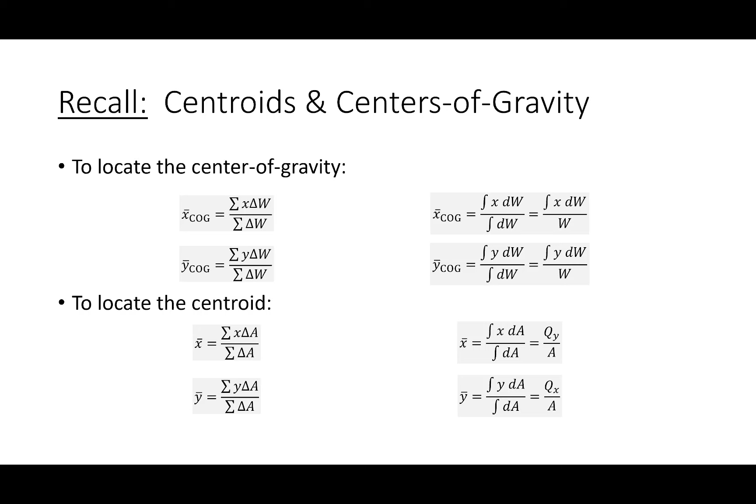Centroids of a three-dimensional region are conceptually no different than locating the centroid of an area or the centroid of a group of lines. It's all kind of the same thing. It's just instead of dealing in terms of areas, we're dealing in terms of volumes. Now, one of the things about a three-dimensional centroid location is that we do still use two-dimensional references.

So I'll give you an example. If I wanted to determine the location of a centroid of, let's say, a triangular prism—so let's say I had a triangular prism that looks something like this, in three dimensions, and that's a right angle, right? So where is the centroid of this simple shape? Well, how do we get there? We go a third of the way up, and then maybe like halfway, and that's where the centroid is.

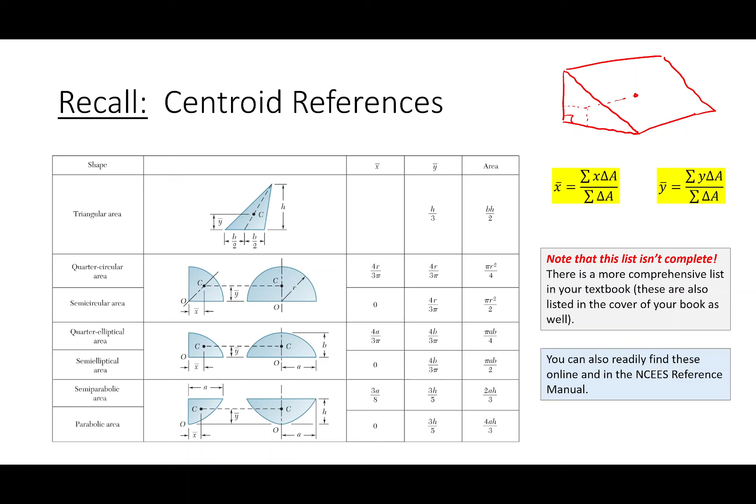Does that make sense? So even though it's a three-dimensional region, it's not like these two-dimensional references aren't relevant. Now that's not to say this is enough—there are some geometries where in 3D we would need a separate reference. So first off, by the way, the pattern doesn't change. We're just integrating or summing in terms of volume, not in terms of areas or in terms of length. But the real thing I wanted to point out to you is maybe something like this.

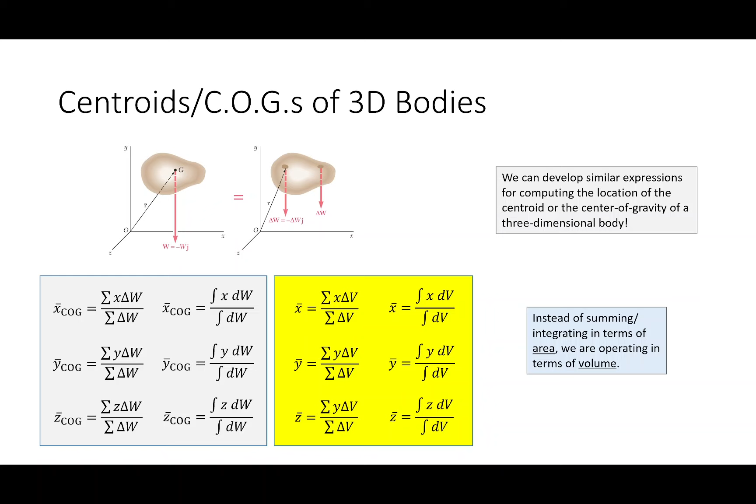So for example, if you had, let's say, a hemisphere—maybe you have some geometry that has like a hemisphere on it. This is probably one of the most practical examples of where a 2D reference isn't going to be enough. This isn't a two-dimensional shape that's been extruded, to use the Engineering 102 terminology. If you had a two-dimensional shape that's extruded, just find the centroid of that two-dimensional shape, and then halfway through the extrusion, there's your centroid. But for a revolution, maybe like a hemisphere or an ellipsoid revolution or something like that, the centroid isn't as simple to find, at least this way. And that's where these references come into play.

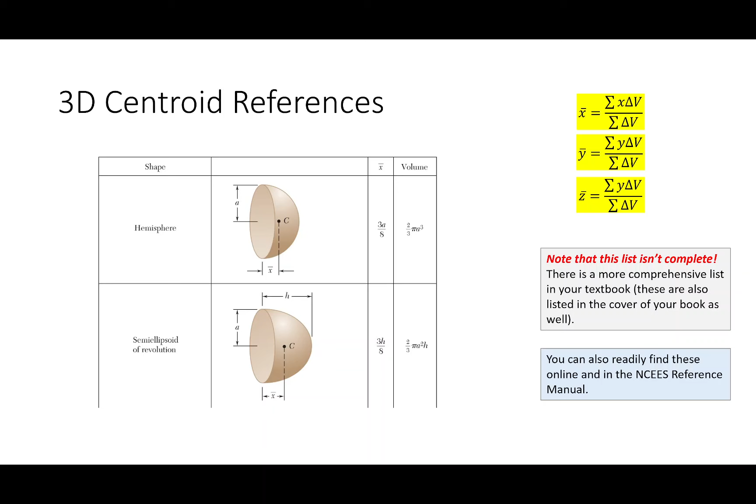I'm not going to use one of these today because I don't really think that's the challenge in locating the centroid in a three-dimensional body. If I'm going to occupy your time here in Engineering 213, I'd rather address what I think are the trip-ups that you're going to have, where you're going to have hiccups doing these types of problems. And the hiccups aren't, oh, well, now I need to use a new reference—you can Google this stuff. The hiccups are what I would call the overlap issue. And the overlap issue will become clear in this example.

Okay, so I have here a three-dimensional part, and we're going to determine the location of the centroid. Now, I'm going to go ahead and tell you that we are not going to locate the X, Y, and Z for the entire shape. What I'll do is I'll locate X, Y, and Z for each individual shape, and then for the purposes of demoing, we'll just pick one. I think I have my calculation set for the Z bar, and then you'll see what I mean—if you wanted to do X bar, if you wanted to do Y bar, it'd be all the same. So let's go ahead and jump right into the example just to sort of make the point, this overlap issue.

And this example really does test my 3D art skills as much as possible. Okay, so what we're going to do here is we're going to break this up into simple shapes the same way that we have been doing problems. And I'm going to see if maybe on this master image right here, maybe I can kind of illustrate what we're going to do. So let's see. Maybe what we'll do is, let's use some color here.

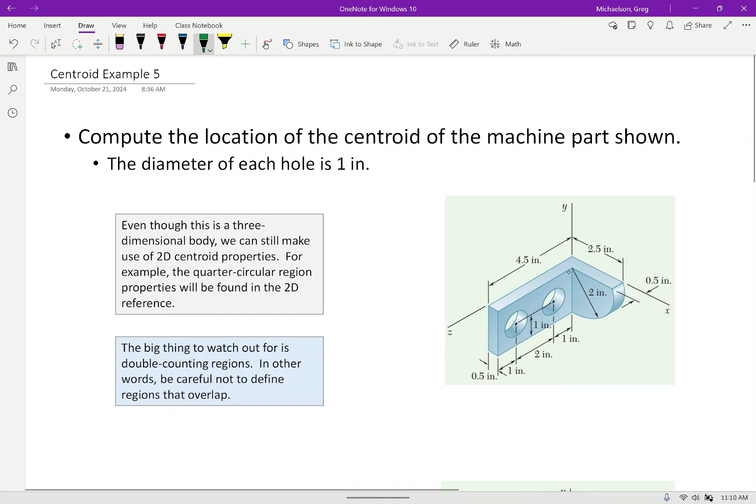Okay. So the first thing that sort of jumps out at my mind is this sort of quarter circular region right here, if everybody kind of sees this. So this quarter circular region, here's sort of the center point. So the center point is sort of like right there. And what we do is we jump out 2 inches and sort of revolve that way.

So if I wanted to separate that into a quarter circular region, I would say that this green line right there sort of corresponds to that simple geometry. Does that make sense? Everybody with me on that?

So if that's the case, I have this quarter circular region, and then I've got 2 holes, right? So I've got, well, I'll use red for those. I've got these right here, which would just be circular cylinders, right? So circle extruded. And then I've got the rectangular prism, if you will, the box, as it were, okay?

Now, the big thing that you want to do is make sure that when you're defining the box that you're fully encompassing the geometry. One of the things that's really sometimes tricky on homework problems or exam problems is to say, well, I'm going to define the box that goes like that. And the problem is that you're not accounting for this central little overlap region. So does the box need to go all the way to the end for this problem?

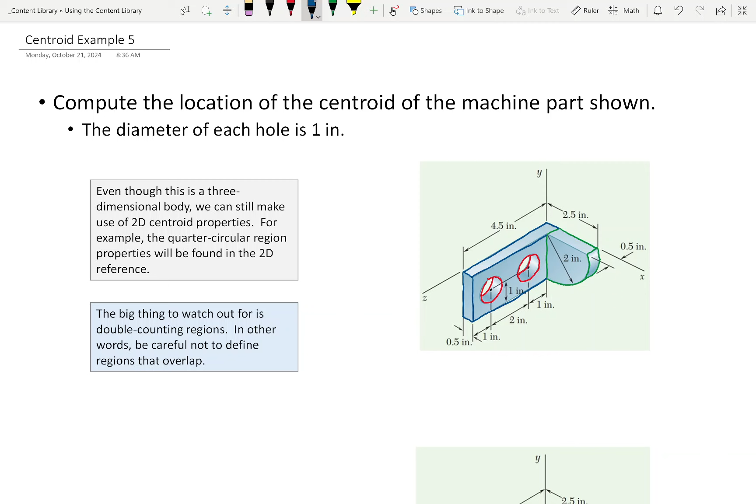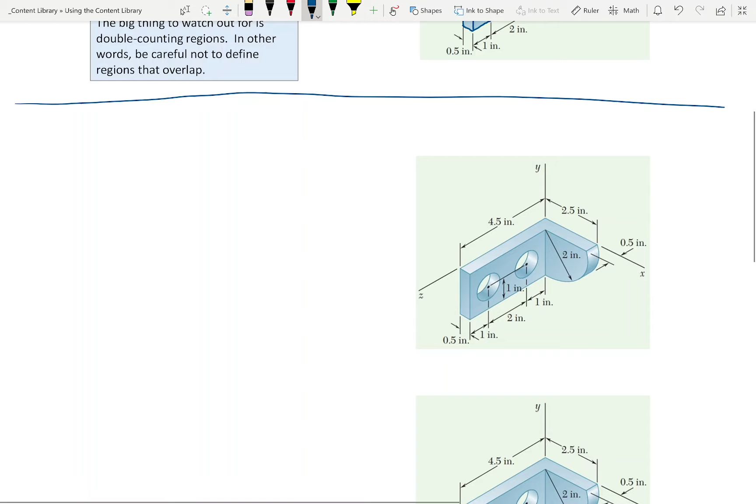And by the way, I sort of cheated here because I made copies of the image over and over again because as we're drawing this out, I didn't want you to go, wait, I didn't get all the dimensions. But I still wanted to go on with the problem. Okay, so we're going to do this one shape at a time. And I'm going to move this up a little bit.

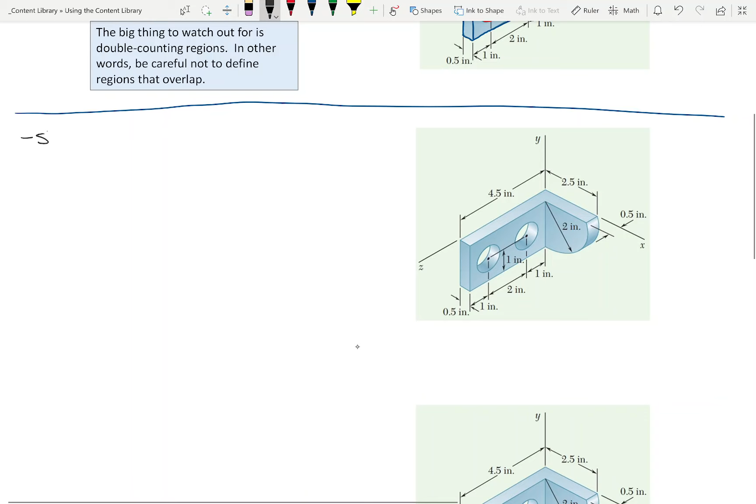And what we'll do is we'll say shape 1. We'll call this a rectangular prism, okay? So just to highlight that shape here on this sketch, what we're talking about is this, okay? So again, this is going to go into that intersection region, okay?

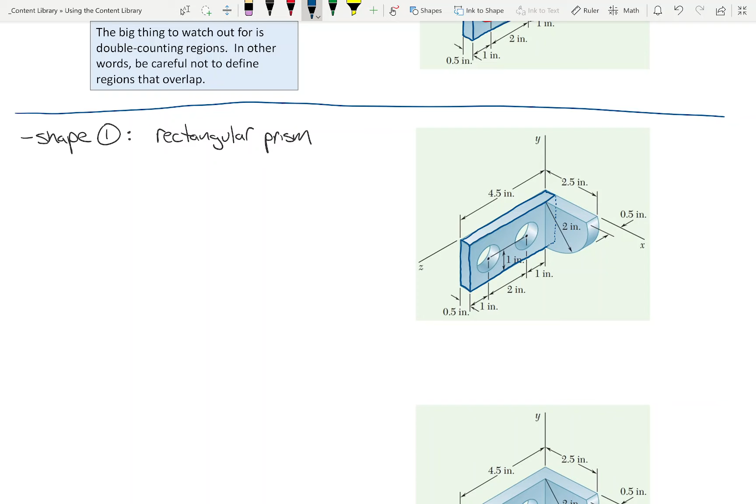And so what I'll do is, remember that perspective stuff we used to do in Engineering 102 where you could see behind the object? There's the dashed line. Okay, so maybe what I'll do now is I'll isolate that box over here. Let's just look at that box, okay?

All right, so the one thing I'll also point out is that point right there. Why am I highlighting that point in particular? What's so special about this point on the prism? Origin. That's the origin, right? So whenever we express our individual distances, we need to express it with respect to that point. Okay? So let's come up with some dimensions.

Okay, so let's see. What is this dimension? What's that dimension? That's 2 inches. Now, it wasn't explicitly given, but we know the radius of this quarter circle is 2 inches. So we'll call this 2 inches right there. Okay. Let's see. Okay, what's that? 4.5 inches. And then the thickness.

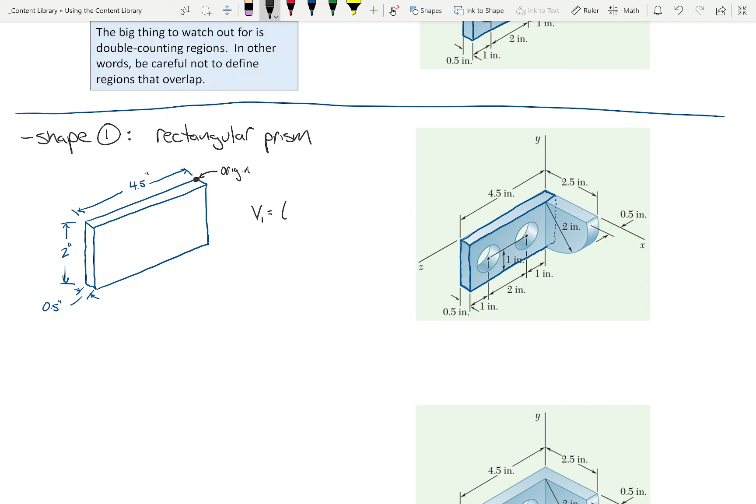That's a 1/2 inch. So therefore, let's do volume first. Let's do the volume. I'll call it volume sub 1. Okay. So this is a box. So the volume of a box is just length, width, height, right? BHL or something like that. So we'll say, right? So the 2 and the 1/2 are going to cancel each other out, and so that's going to be 4.5 cubic inches.

Okay? Sound good? And then what I'm going to do is I'm going to say, okay, give me an X1, a Y1, and a Z1. And we're going to express those with respect to the origin. Now, by the way, let's make sure we're all clear, right? The centroid of this simple shape is going to be like right there, in the middle of the box, in the center of the box.

So here, this is the x-axis, right? So how far along the x-axis do I have to travel to get from the origin to the centroid? Along the x-axis. A 1/4 inch, right? Because that's that little thin dimension. That's this 1/2 inch. So we're only going half that. What about the y-axis? Right there. -1 inch. Because the y-axis is pointing up. We have to go down to get to the centroid. So this is -1 inch.

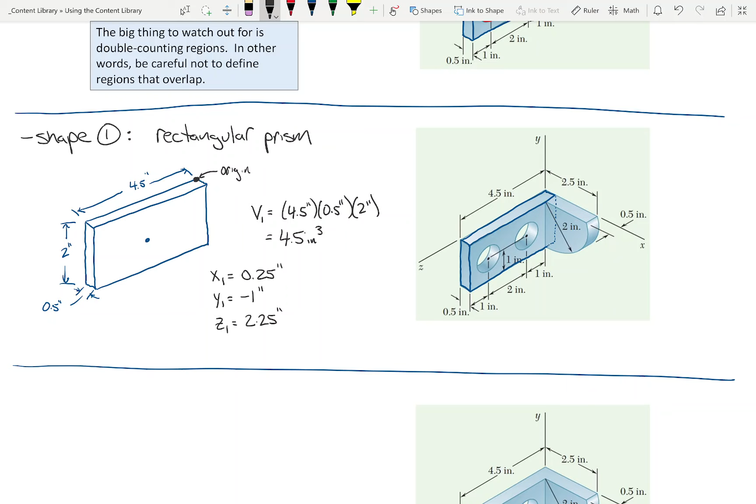And then along the z-axis is going to be what? 2.25. Okay. Is that okay? Does that make sense? Everybody okay with that? All right. Any questions? Okay. So now we'll do shape 2. And this shape 2, I'm going to call this quarter circular region.

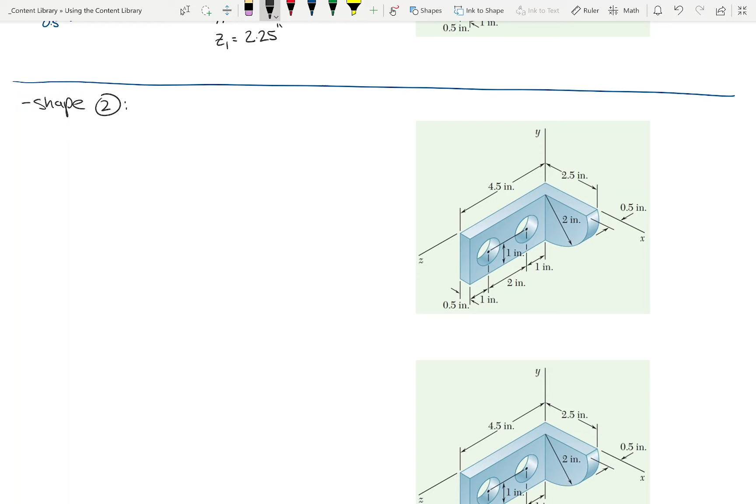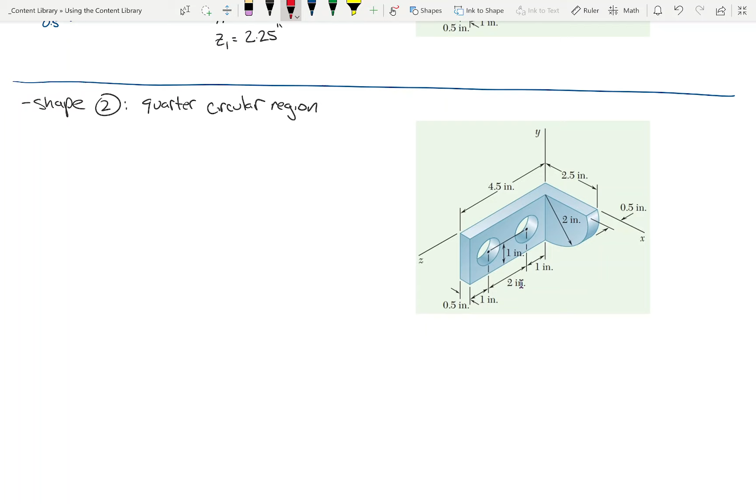And by the way, do me a favor. Let me drag this down because I have a feeling I'll need a little bit of space here. Let's go a little further. All right. So this is where bookkeeping is really important. So this is another sort of hiccup that you can get. So what we're talking about. Oh, what happened there? Sorry. We're talking about this region right here.

Okay? Now, by the way, for a quarter circle, right? And I'll stick this here on the board. If you have a quarter circle, and you want to find this dimension here, or this dimension here, both of them are still 4r/3 pi, okay? The same thing for the semicircle. So I'll just stick that up here on the board for reference. But we got to be careful with our bookkeeping, okay?

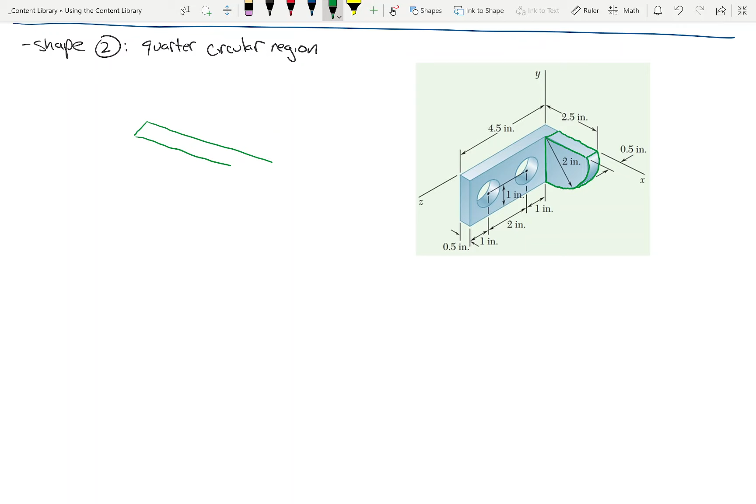So, oh, this is going to be tough. Okay, bear with me. All right, so let's see. I'm going to draw this maybe kind of big. Maybe that'll save me. That's about the best you're going to get out of me. I am not drawing that again.

Okay. Now, by the way, where is the... so hold on. Let's make sure we're all paying attention. So that's the origin, right? You're shaking your head no. Why? Because it's based off the origin a half inch away. Exactly. So the origin is actually like right there. Does that make sense? Okay. That's important because when we start calculating our X, Y, and Z values, we have to be cognizant that we're referencing these appropriately.

Okay. So let's see what I can do here. Bear with me. So by the way, let me just do this. R equals 2 inches. And then, wait, oh, wrong way. Both of these dimensions are going to be 4r over 3 pi, okay? And by the way, this thickness is 0.5 inches. Okay, and help me out. What is that dimension right there? This little dimension right here, from the origin to this little edge right here? 0.5. That dimension right there is 0.5 inches.

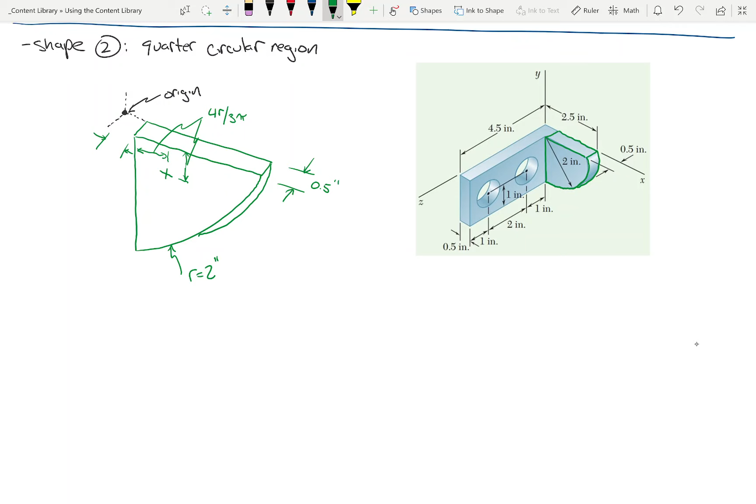Okay. Let me do this. Do something like that. Okay. I'm not drawing anymore. I think I'm hitting my limit on my artistic abilities.

Okay. Let's do what we did last time. Let's first off calculate a volume. So let's assume that this was a cylinder. How do you calculate the volume of a cylinder, right? So if it was a circular cylinder, we're going to have to do this problem here in a bit anyway. So you take the area times the height, right? So pi r squared times the height. But because this is a quarter cylinder, we're going to take pi r squared over 4 times the height, right?

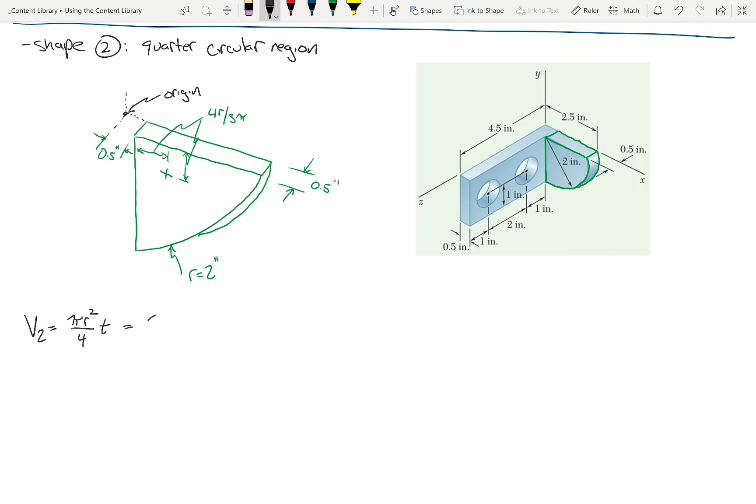So this is going to be, we'll call it times the thickness. Lower just a little bit. Does that make sense? So this is going to be, okay. So how's this going to work out? So we have 2 squared over 4, and 4 is going to cancel, so half a pi. Half a pi is what, like 1.571?

Is that fair? So what are we getting for these? Okay. Oh, I need a, like that. And if you want to know why I draw a line through my Z's, tell me the difference between that Z and that 2. I can't do it. Okay.

Okay, so let's start off. Let's do the easy one first. Let's do the Z-axis. How far is it from the origin to the centroid along the Z-axis? This way. Well, if it's a 1/2 inch thick, it's just going to be a quarter, right? 0.25. Maybe I'll put some space between these because I have a feeling I'm going to need it. Okay.

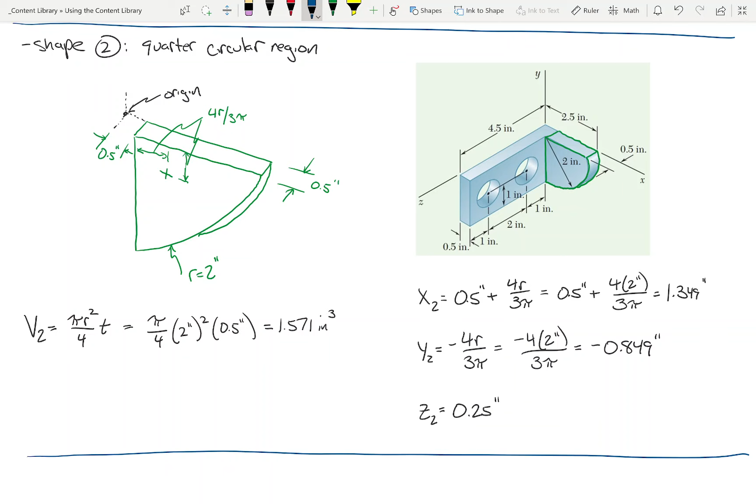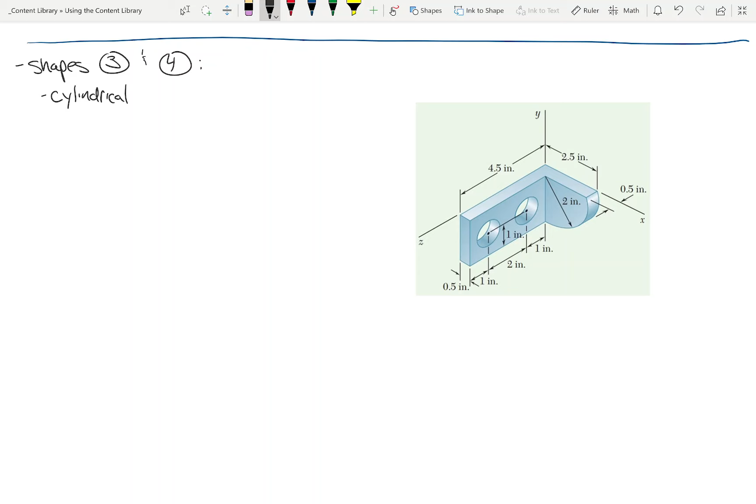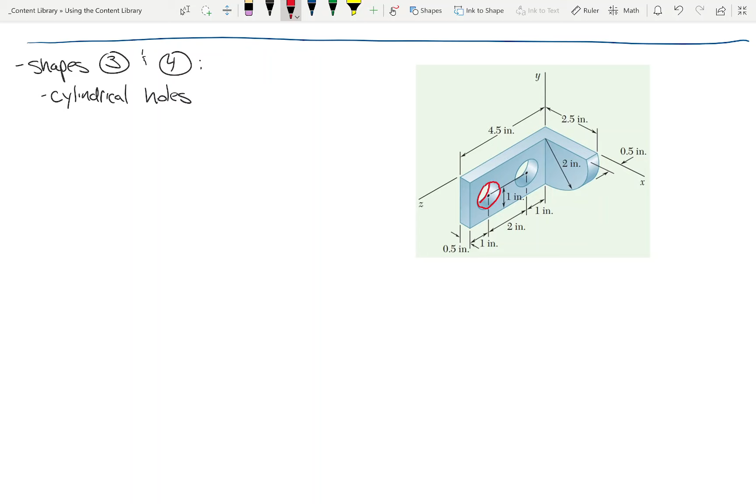All right, does that make sense? Everybody okay with that? Okay. So far, so good? Now go ahead and scroll. Okay. So the next thing that we have to do is these holes. Okay. And I'll call them cylindrical. Okay, so for these cylindrical holes, I'll drag this up a little bit. Okay, so we're talking about this and that. Okay.

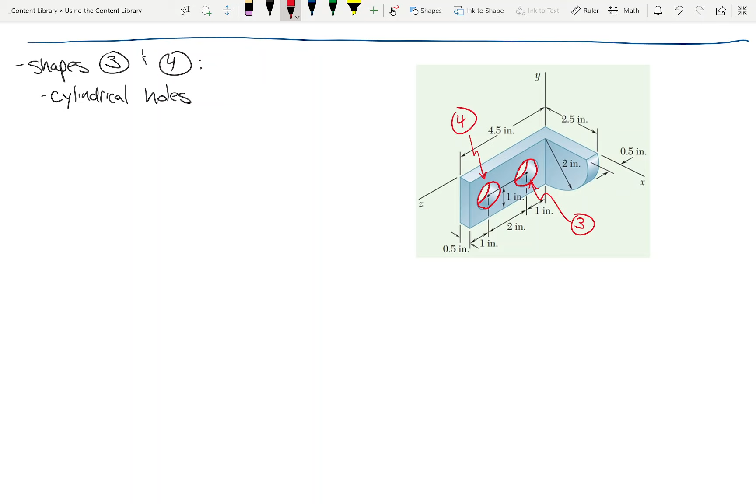Now, first off, let's label these a bit. Okay. So we'll call this hole 3. Call that 4. Okay. I think at the beginning of the problem, yeah, the diameter of each hole is 1 inch. So we'll say, note, the diameter is 1 inch, so the radius is a 1/2 inch.

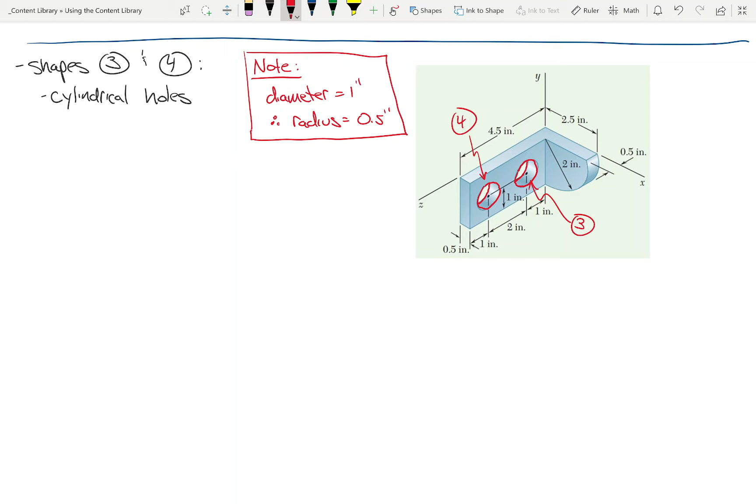Okay. So let's package together as many calculations as we can. Both of these holes are going to have the same volume, right? They're going to have the same volume, so the volume is just going to be pi r squared times the thickness, right? Anybody have a problem with this calculation? It should be negative. Why is the volume negative? Because it's a hole. We are removing that material. Okay? So this is going to be

that, or, so basically it's just going to be pi over 8. And I hope you'll permit that I can just tell you that's that. Okay? So far so good? Okay. So let's see what we can do. Okay, so we're going to have an x3, y3, z3, x4, y4, z4.

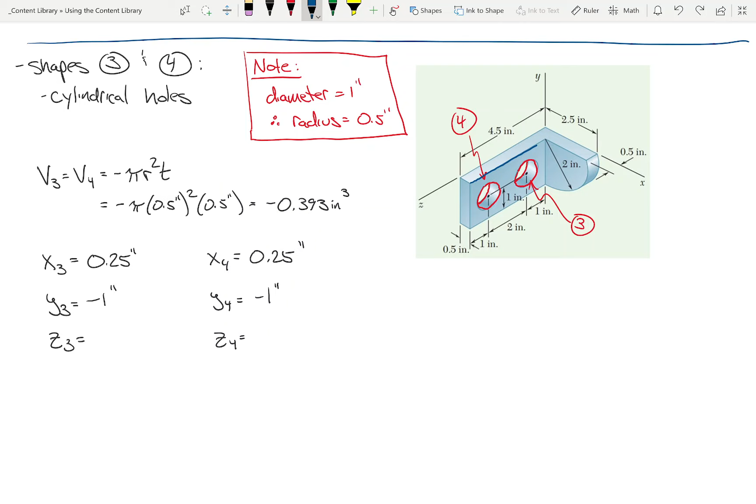What's the z going to be for 3? Let's say for 3. What's the z going to be for 3? -1. Okay. All right. 1.5. 1. Oh. Why did you say 1.5? Because there's this. Ooh, see? Right here. So check this out. So like the axis goes like this way. There's, oh, that drawing was horrible. Bear with me. So keep in mind, let's draw the blue box. Keep in mind the blue box goes back some.

What's that? Because the 1/2 inch is coming from the thickness of the quarter circle. Yeah, that's what I'm saying. We've got to account for that part. So what I'm saying is that Z3 is 1.5. Does that make sense? Because we got to go back that way. Okay. So if this is 1.5, what's this one? 3.5. There we go.

Does that make sense? Okay.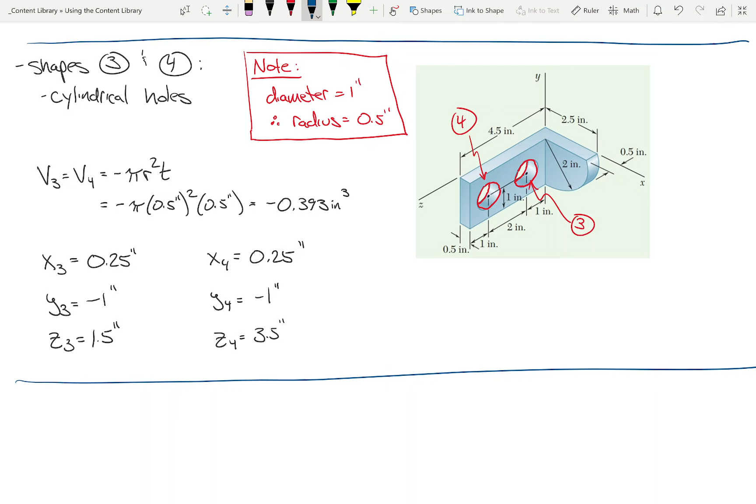If that makes sense, then the location of the actual centroid calculations is sort of a breeze. All you need is the x, y, and z for each shape and the volume of each shape. So what I'm going to do is only do one of them.

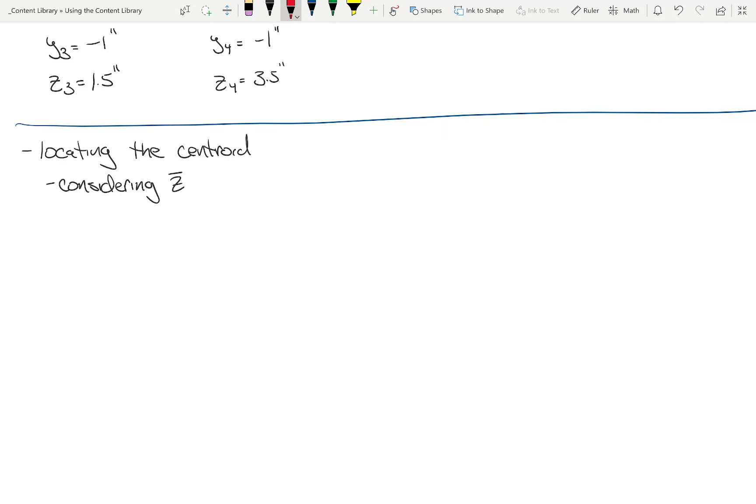Let's just consider z bar. Again, it's going to be the same for all of them. So what we're going to do is just go through this.

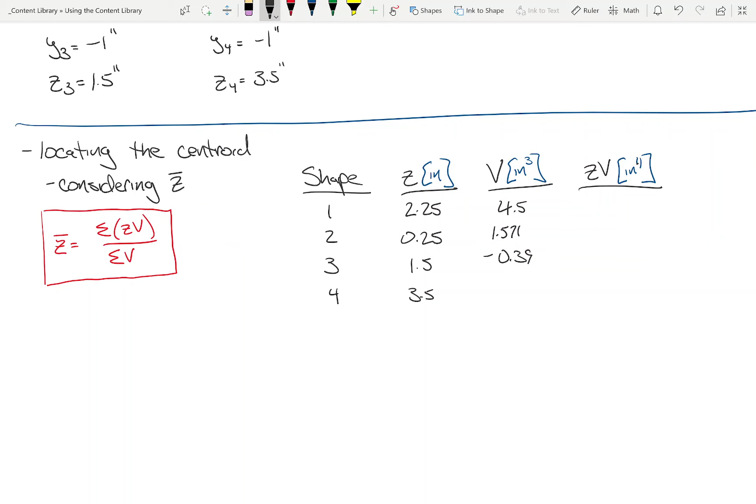So we have 4 shapes. I'm hoping you find this part boring, because all we've got to do is go back to our calculations. This one was 2.25, this was 0.25, this was 1.5, this was 3.5. Then for the volumes: this was 4.5, this was 1.571, this was negative 0.393, this was negative 0.393. So then we multiply row by row.

10.125, 0.393, negative 0.589. By the way, what software package would make quick work of this? There we go.

And then we sum at the bottom. We'll sum up the volumes, and we'll sum up the volume times the moment arms. And so therefore we get a Z bar of something like 1.618 inches.

And the point is, if you wanted to do one for X bar or Y bar -- oops, I didn't put a bar over it -- it wouldn't be really that challenging. It would just be the same stuff all over again.

Okay. Does that make sense? Okay.

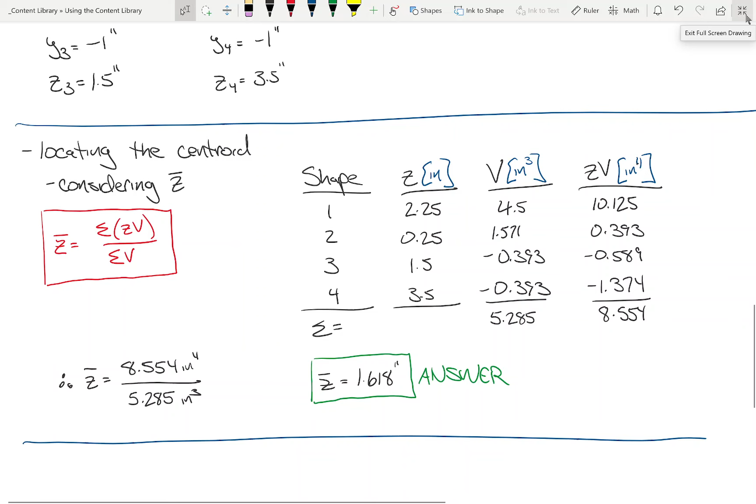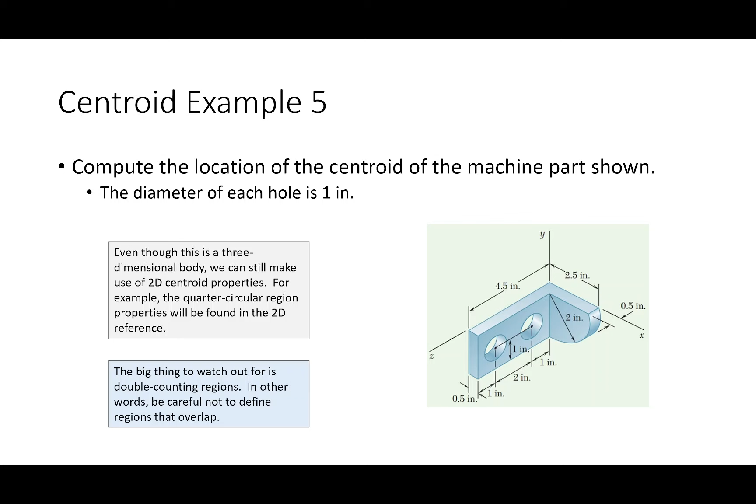So in terms of centroids, that's all I have to teach you, okay? Because we've done centroids of areas, of lines, of volumes. That's pretty much it when it comes to centroids. So why do I have two more lectures, or this and then the lecture next time? Why is it still titled centroids? Because we're going to do something else.

I want to talk about another term related to a shape, and that term is called the moment of inertia. Okay?

One question worth posing at this point is, what does the moment of inertia have to do with the material we've discussed in Engineering 213? And to be totally honest with you, nothing. Not a thing. So some of you are probably asking, okay, then why are we talking about this?

Okay, two reasons. The first reason is that the moment of inertia is an incredibly important section property that will be relevant to every single one of you later on in your engineering curriculum. The second reason is that in order to compute a moment of inertia, you must be able to locate the centroid. In fact, the algorithm we use to compute the moment of inertia, we can just sort of tack on to a centroid calculation. So it's a very natural place to start learning about it. This is kind of a good point to talk about it.

Now, in order to explain where a moment of inertia is relevant, I want to go back to something from when we were first deriving our calculus-based expression for centroids. We had developed a notation: we said, okay, we have the area, and the area is just the integral of dA. We're just summing up those little dAs across our region of interest. And then we have the first moment of area, which was the integral of x dA, right?

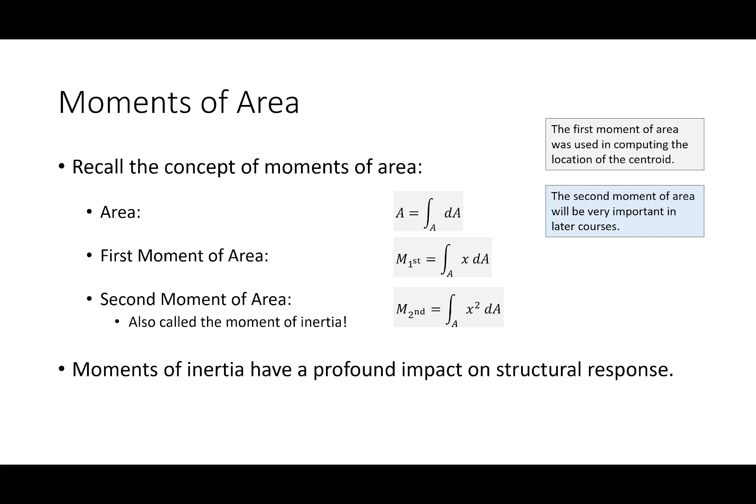So let me give you a visceral example to explain what I'm talking about. How many of you have at your house a deck or porch, an elevated porch, maybe something like this? If you were to strip out the little slats that the grill and benches sit on, you're going to find floorboards oriented like this, sticking upright. Why aren't they laying flat? Why do we do this and not that?

Before all the math, before this mathematical discussion, the answer you would have told me is, well, they're just stronger that way, right? Imagine taking a yardstick. If you bend it one way, it's really flimsy, but turn it 90 degrees and suddenly it's really stiff. If you were to whack somebody on the head with the yardstick the stiff way, that would really hurt, right? Make sense? Okay, now that's just the common sense answer.

Now let me give you an engineering mathematical description. I propose that if you were to compute the moment of inertia about the horizontal axis of this shape versus this shape, you would get a much larger value this way than this way. Make sense? And that's what a moment of inertia is. A moment of inertia will tell you flexural response. If you're going to take something and bend it, what is the most opportune way to bend it?

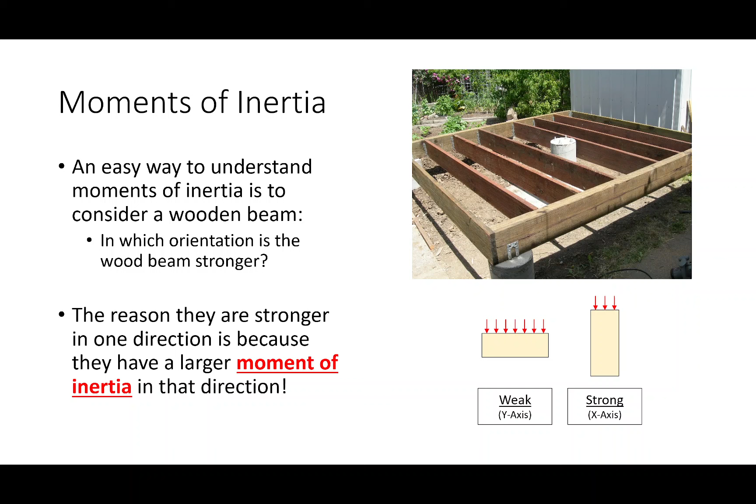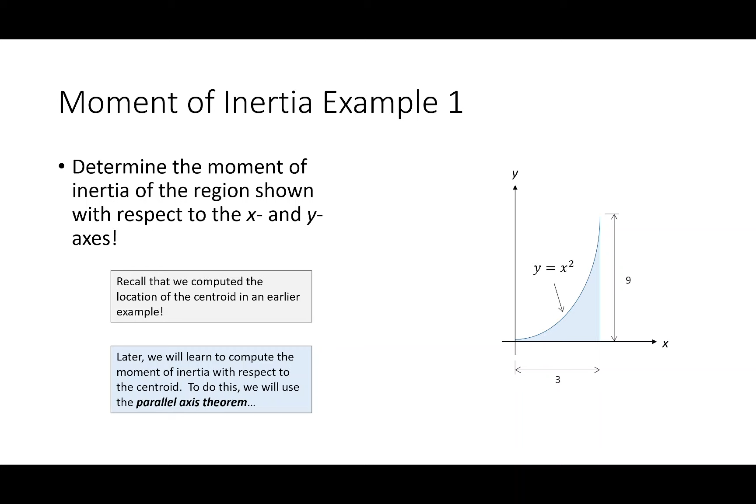Now the way that you compute a moment of inertia is you take the integral of x squared dA. So just to walk you through the calculus of how this works, let's go back to this example. We had done this example in a calculus fashion, and I'm going to walk through the math very quickly. I'm not going to do this problem over and over again. And by the way, I'm not going to make you locate or compute a moment of inertia using a calculus-based approach on a homework assignment or even on an exam.

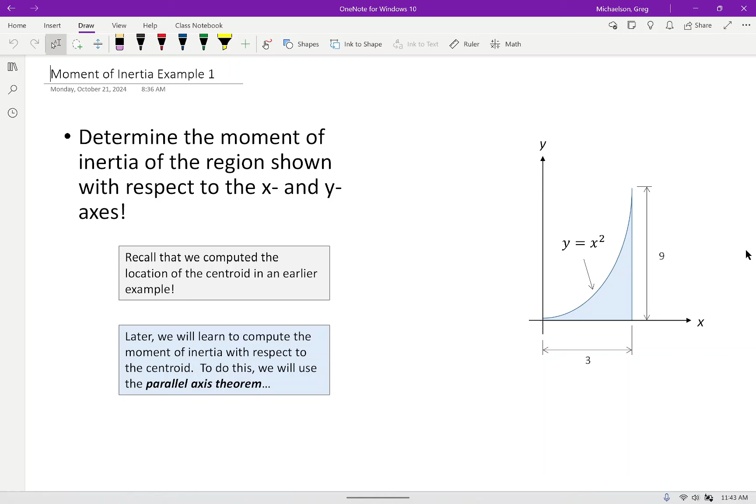What we're going to do on our homework and maybe on our exam is use what's called the parallel axis theorem. We're not going to talk about the parallel axis theorem until Friday. But just to make the point, if you're using a calculus-based approach, the calculation isn't really that challenging at all. So let's take this region.

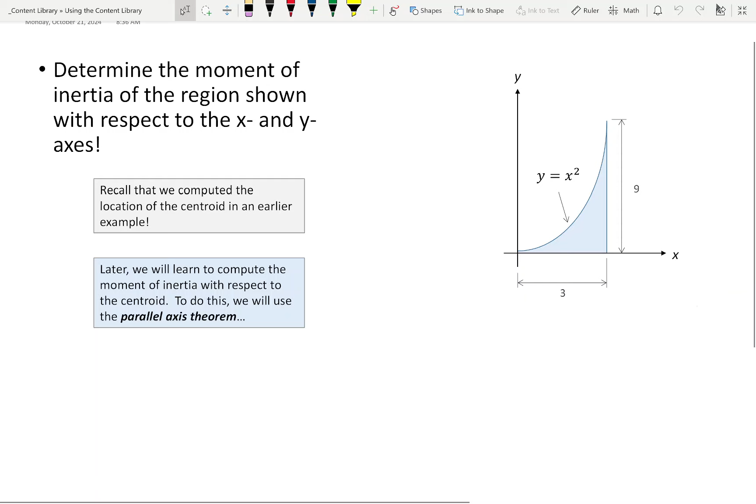We had done this problem in class. We said let's locate the centroid of this region. Now I want to compute the moment of inertia. So I put my little cheat sheet here on the board. Let me just remind you all of a couple things that we've already done with this example. So I'm going to make a point about a couple things.

Let's recall. Recall that one of the first things we had done for this example is we had derived dA. Now for dA, we had two definitions for it. We had x squared dx. And then when we performed our integration, we integrated from 0 to 3 when we did it this way.

But if we integrated up and down, another way was to say this. And then we integrated from 0 to 9. We've already done this. We had already done this in our last example. Okay, we already did this.

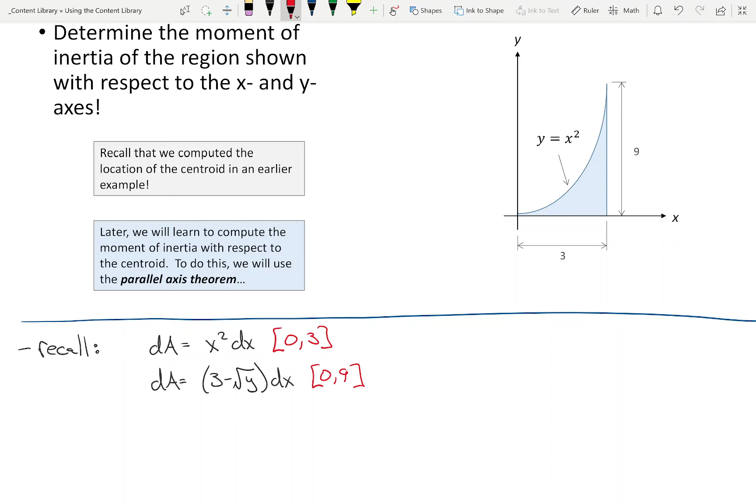We've already computed the area, which is 9. We already did that. And we had already done these integrals. We did qx and qy. Qx and qy are our first moments of area, and our first moments of area were just the integral of x dA and the integral of y dA.

Oh, here I made a rookie mistake, I forgot to flip the indices. Remember that the first moment of area about the x-axis is the integral of y dA, and the first moment of area about the y-axis is the integral of x dA. We had already discussed that as well. And when we did that, we got an integral of 243 over 10, and then 81 over 4.

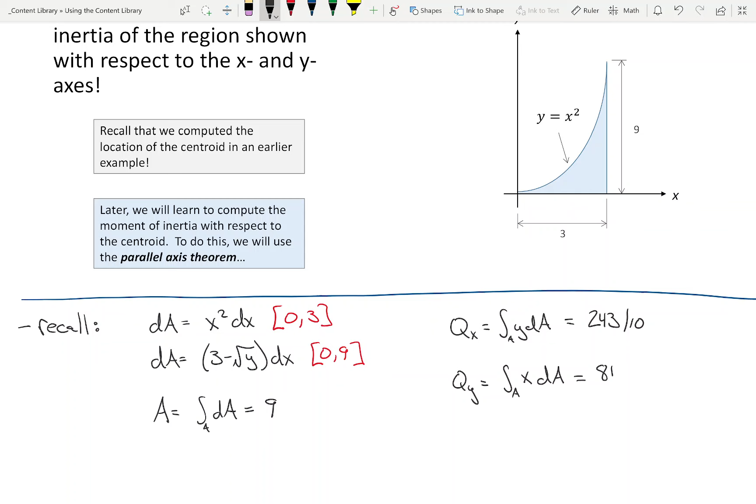So all I'm going to do is the following. For the moment of inertia about the x-axis, the only way it's really easy: instead of integrating y dA, I just integrate y squared dA. So that's just going to be the integral of y squared dy. Oh, I had a typo up here, that's not dx, that's dy. And then I'm going to integrate that from y equals 0 to y equals 9.

Again, I don't think this is all that challenging because we've already done integrals like this before. So I'll go ahead and tell you, when you chug this out, you get... this is 729 over 7, which is 104.14. The other one is 48.6. So this one's just integrating in terms of x.

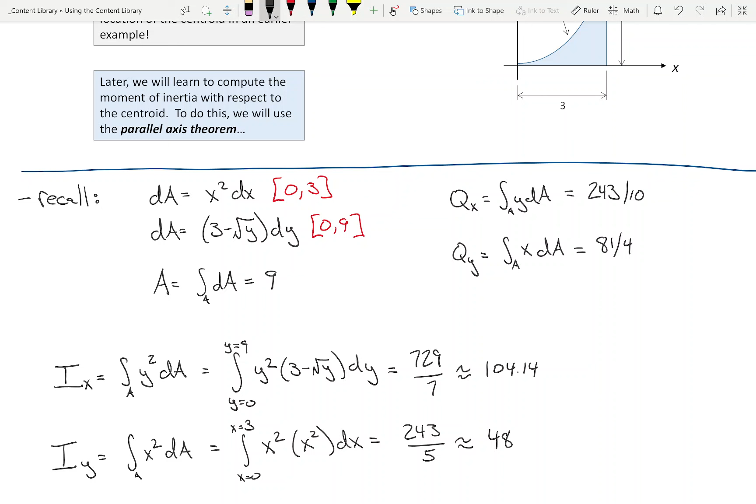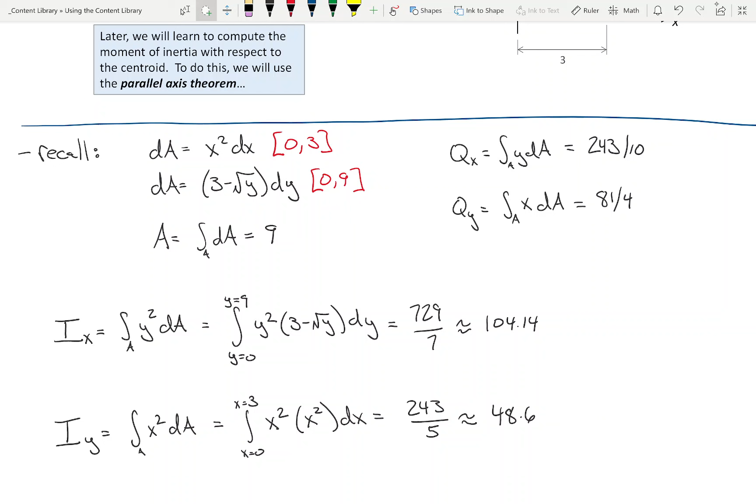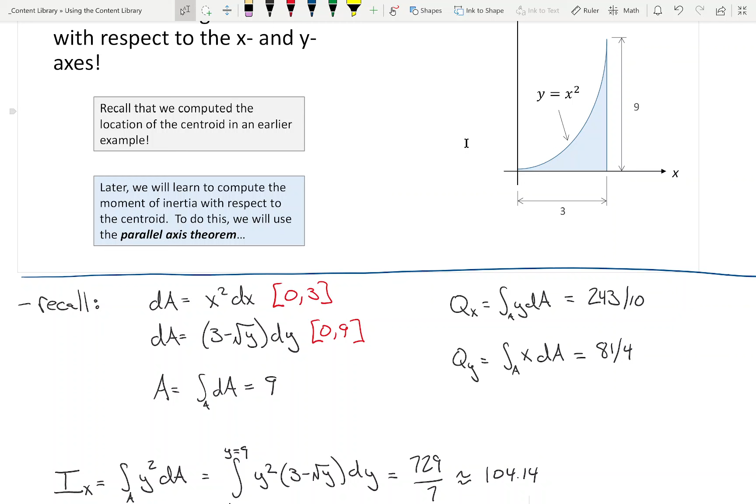So there we go. The main point I want to make is here's the shape, let me draw it. Imagine I had a prism made out of this shape. About which direction would it be stiffer, bending it this way or bending it this way? I propose that if we look at our shape, it would be easier to bend it this way than to bend it up and down. And that is reflected by the fact that the moment of inertia about the x-axis is higher than the moment of inertia about the y-axis.

It's kind of like I said about the floor beams in your deck. Oriented this way, the moment of inertia is higher than if they are oriented this way. So what we're going to talk about on Friday is how to compute the moment of inertia of a composite shape. Again, we're not really going to do the calculus, but yeah.

So if this is in real life, how would you know what like x squared would be? Like how would you know what the curve would be? That's a good question. Are you talking about the shape? So in real life, to be honest, we're not really going to have many steel I-beams or even the femur that I mentioned earlier mapped by something like x squared or square root of x. This is just for us to wrap our heads around the math.

In real life, one of two things is going to happen. It's either going to be comprised of simple shapes like rectangles and triangles, which is what we're going to do, or the shape is going to be highly irregular, in which case you would just get a software program to calculate it. And what is that software program going to do? It's going to break it up into a bunch of tiny regions and basically do it on a pixel by pixel basis, like image correlation stuff that'll do that.